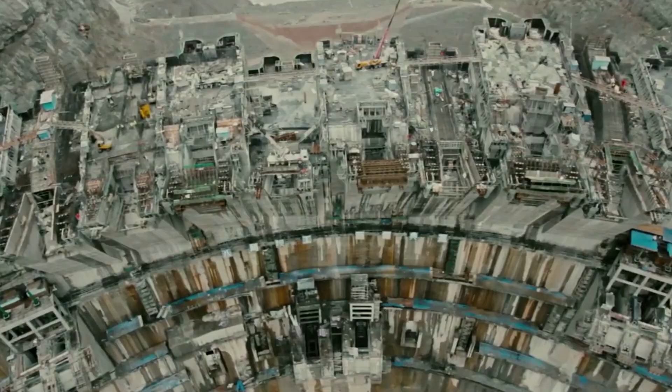The average American uses around 150 to 250 gallons of water daily.

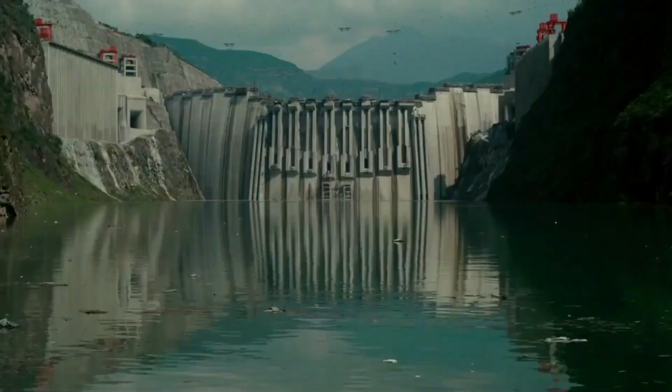We are overusing it. We are overtapping it. And we are overpumping it.

Scarcity of water is not like other disasters. It can eradicate the entire human generation if it becomes worse. It is high time for us to start deliberate actions to reuse and recycle water more effectively.

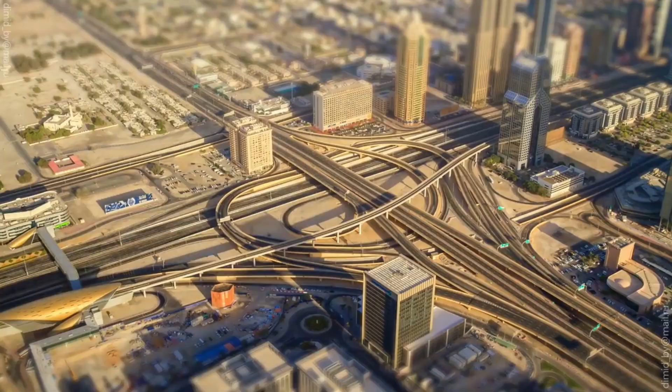Pact is one of the leading manufacturers and suppliers of industrial and municipal water and wastewater treatment equipment and plants.

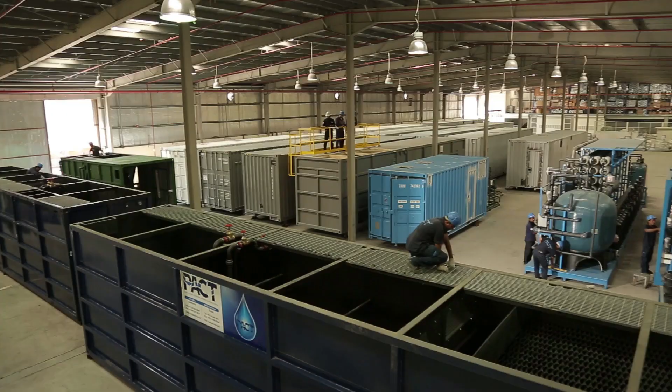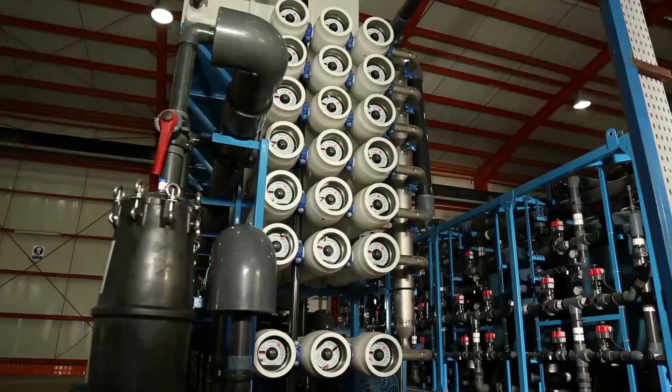The experience of 17 long years in the realm of water and wastewater treatment has enabled us to cater to the needs of our customers with the most advanced and affordable solutions.

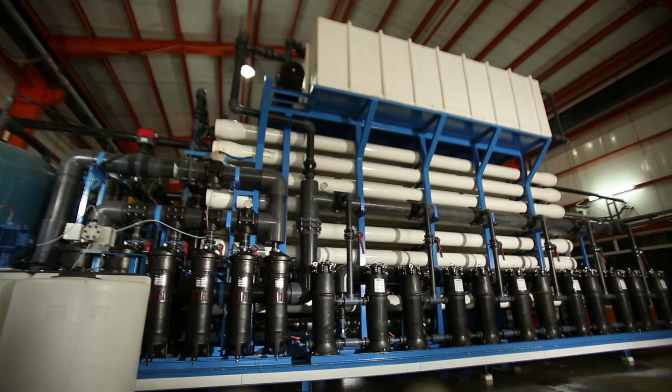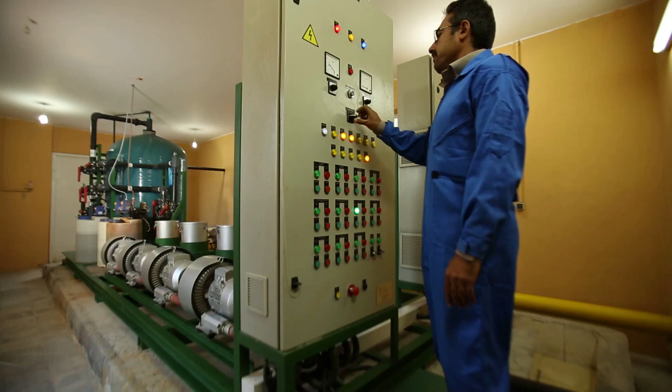Pact engineers have a broad range of expertise in the physical, chemical, biological, and membrane processes for water and wastewater treatment. In every discipline, Pact provides numerous process choices to solve complex treatment problems effectively and economically.

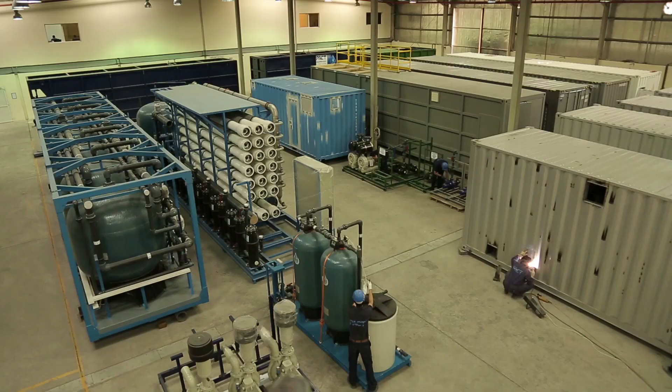Free zone with 150 team members on board, providing a full range of services in water and wastewater treatment for both the municipal and industrial sectors.

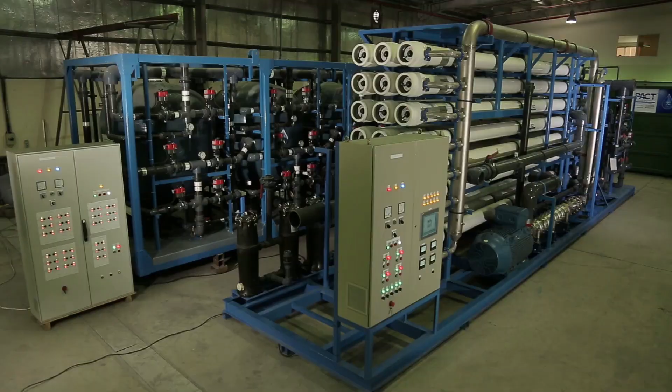Our process starts with a detailed review and analysis of our customers' needs, and customizes our products and services, which provides value to the customer requirement.

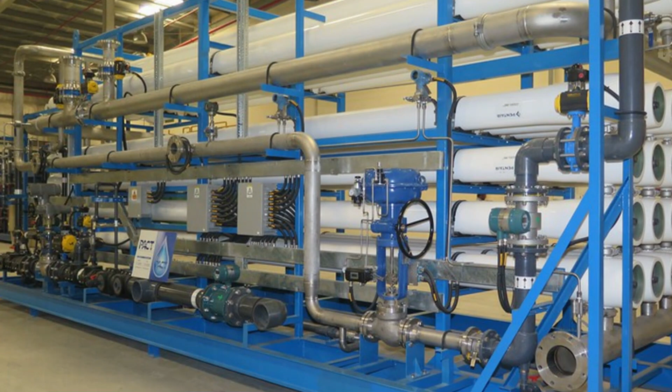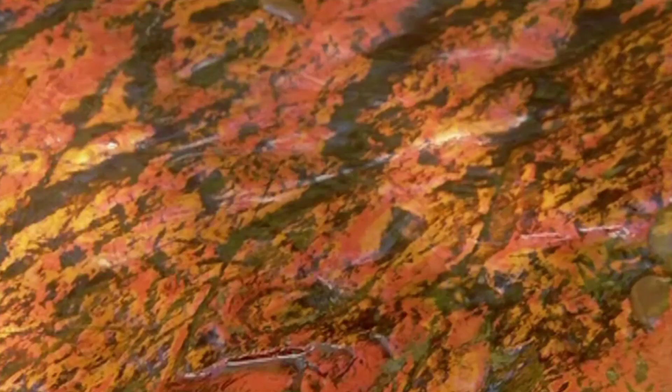Water treatment is the industrial-scale process that makes water more acceptable for an end use, which may be for drinking, industry, or agriculture.

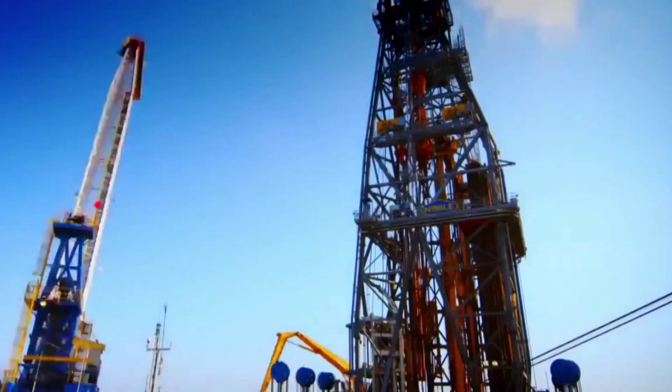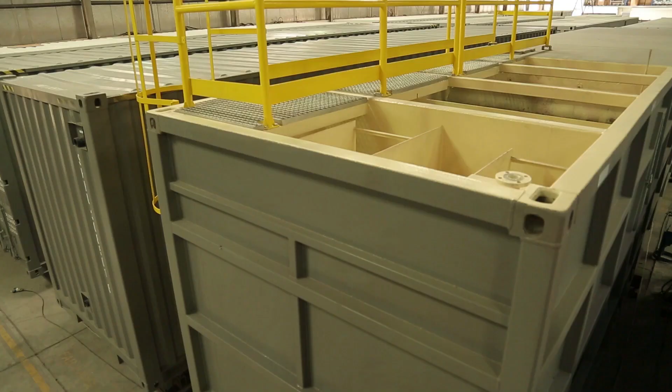The processes involved in treating water for drinking purposes, to provide a safe source of water supply, may include solid separation using physical processes such as settling and filtration, or chemical processes.

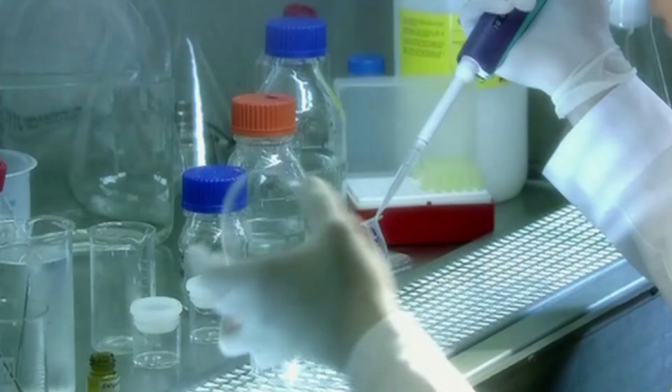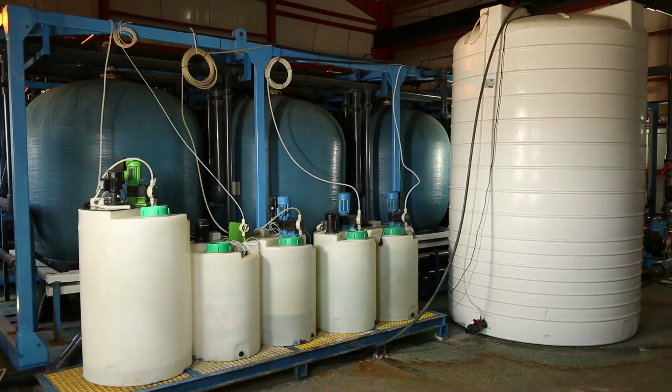Such as disinfection and coagulation, filtration, desalination, and disinfection.

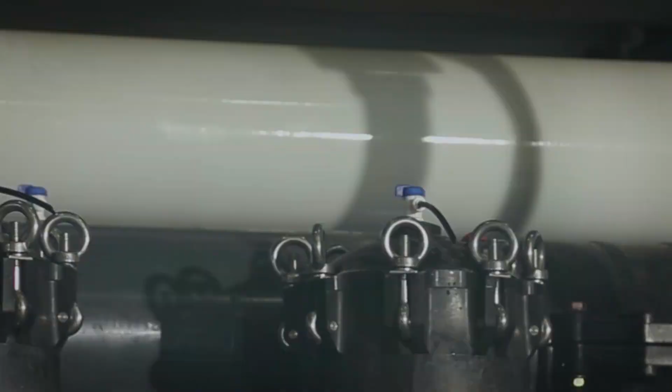Most modern desalination facilities use reverse osmosis, in which water is pumped at high pressure through semi-permeable membranes that remove salt and other minerals.

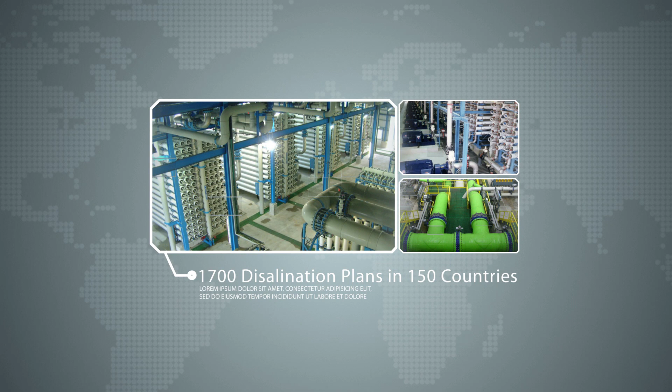Worldwide, about 300 million people procure some fresh water from more than 17,000 desalination plants in 150 countries.

Middle Eastern countries have dominated that market out of necessity and energy availability. But with threats of freshwater shortages spreading around the world, others are rapidly joining their ranks.

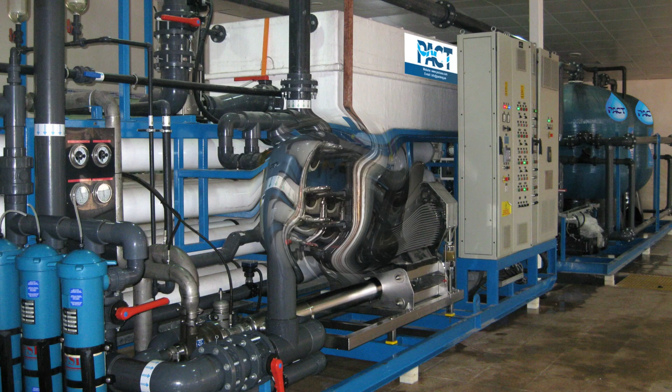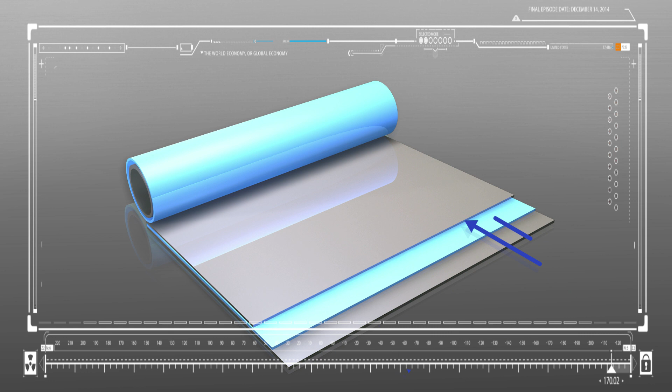Reverse osmosis, or RO, is a water purification technology that uses a semi-permeable membrane to remove larger particles from drinking water.

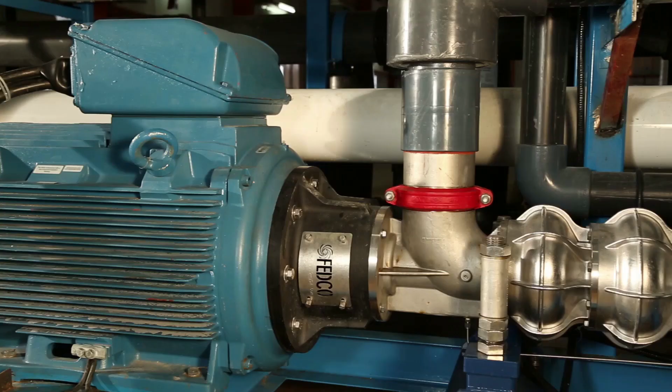In reverse osmosis, an applied pressure is used to overcome osmotic pressure, a colligative property that is driven by chemical potential, a thermodynamic parameter.

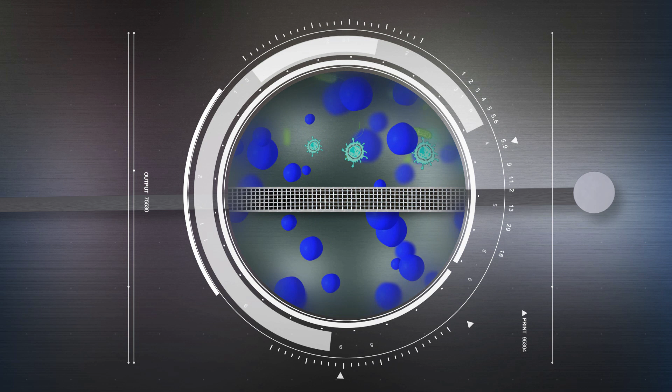Reverse osmosis can remove many types of molecules and ions from solutions, including bacteria, and is used in both industrial processes and the production of potable water.

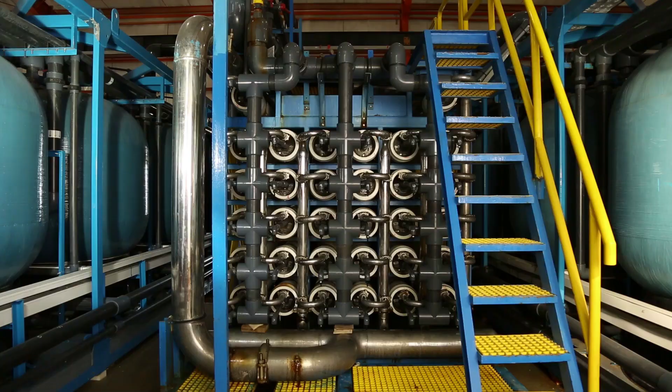The result is that the solute is retained on the pressurized side of the membrane, and the pure solvent is allowed to pass to the other side.

To be selective, this membrane should not allow large molecules or ions through the pores, but should allow smaller components of the solution, such as the solvent, to pass freely.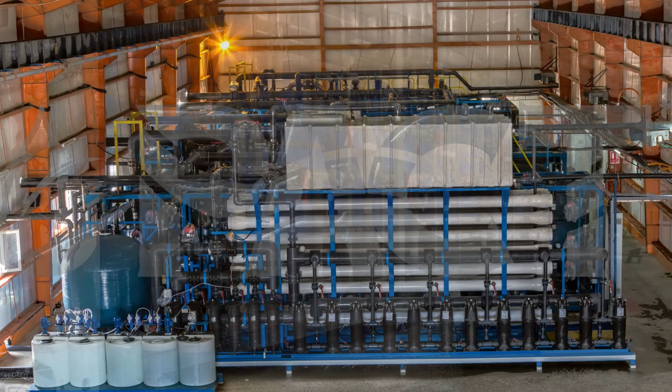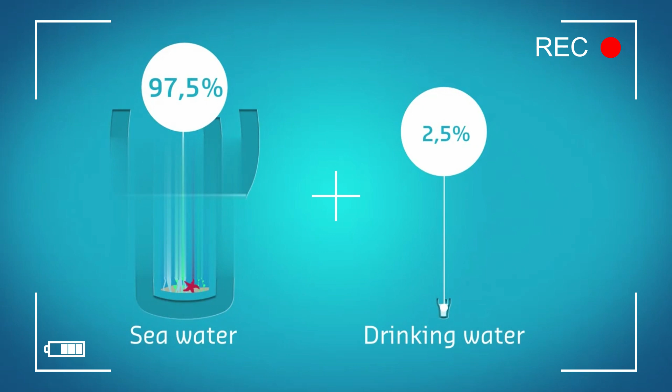Water. There's one word for it, but two ways to describe it. There's water we drink and water we can't drink. More and more of us are consuming this drinking water, which represents only an infinitesimal part of the resource available on Earth.

In 20 years, 47% of the world's population will live in areas subject to serious water scarcity. And yet, 40% of us live near the coast.

What if getting a mouthful of seawater could one day become enjoyable? What if we could actually drink seawater? Let's see how this is possible.

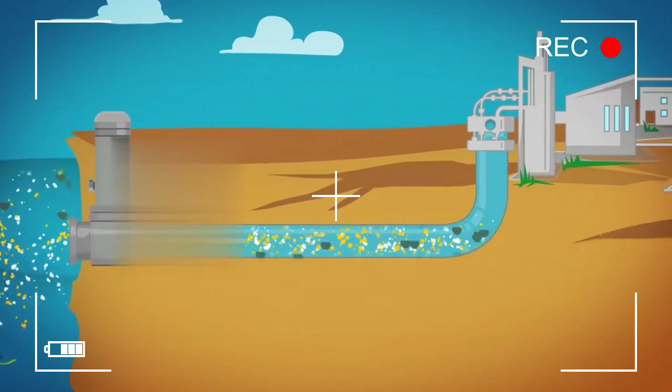To protect the marine ecosystem, seawater is pumped at a speed 3 times slower than a fish swims. This water is then filtered to remove all particles such as algae and sand.

After this stage, only molecules of water and salt remain. The salt water is then sent at a very high pressure through an extremely fine membrane.

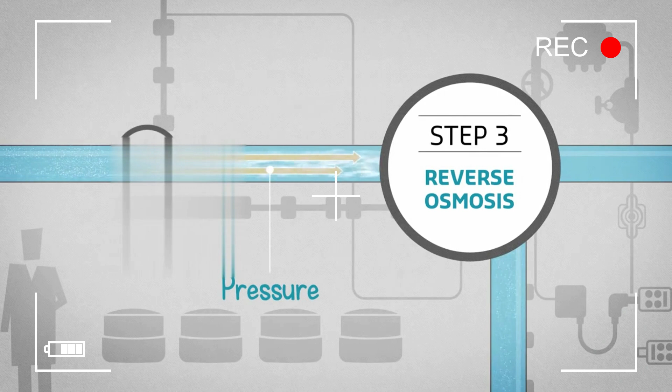The pressure exerted on the water during this process is equivalent to 100 elephants standing on a manhole cover. This is called reverse osmosis.

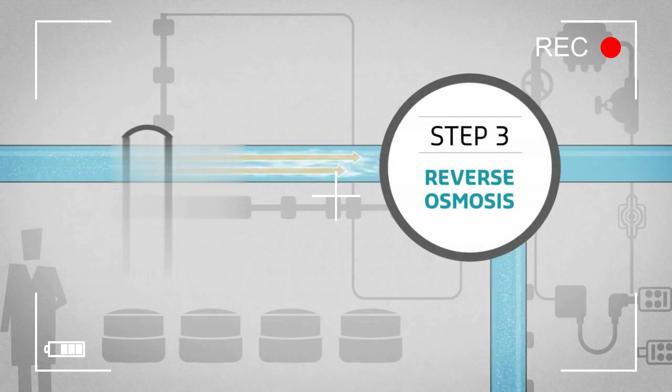The energy produced by this process is partly recovered and reused to operate the plant. For every 2 liters of salt water pumped, we obtain 1 liter of pure and demineralized water.

The other liter of water, called brine, is twice as salty. After being treated and diluted, it is returned to its natural marine environment.

The pure water is enriched with mineral salts essential for human health, and the water is then distributed in the drinking water network, all the way to the tap.

Today, more and more plants are desalinating seawater, providing certain countries with nearly 60% of their drinking water. Desalination is a solution to meet the 21st century's water requirements.

In 2015, desalinated water will already represent more than 2% of water consumed, and thanks to research and innovation, the technology is improving every day.